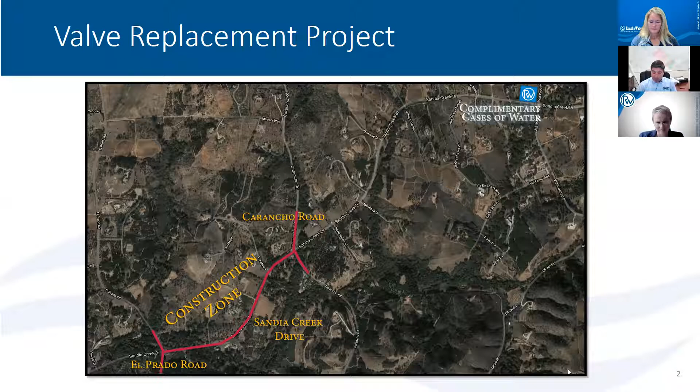So what is it that we're doing? At the intersection of Sandia Creek and El Prado, we're going to be replacing 7 isolation valves. They range in diameter from 8 to 24 inch. In addition to those 7, up at Carancho Road and Sandia Creek, we're going to be replacing 1 24-inch valve. We have an outside contractor that'll be doing the work at Sandia Creek and El Prado, and RCWD crews will be doing the work at Sandia Creek and Carancho, the 1 24-inch valve.

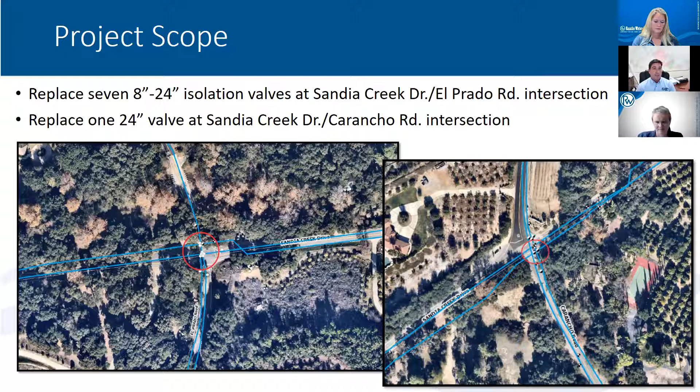Why do we put these isolation valves in? Really, the isolation valves are just for that. They're for isolating sections of our distribution system so that when we have to shut it down, whether planned like this event or unplanned, we have manageable sections of pipeline to deal with. Pipelines have to be drained and brought back in service once work's completed. So the isolation valves are really critical to the ongoing maintenance and repair of our system.

So I'll take you through a little bit of the timeline of what you're going to see, like Kimmy said, from Monday night to Wednesday morning. And even beyond that, because first thing is pre-construction activities. What we'd like to do is actually pre-dig the sites, so before we do the work, we open up the hole. This is before any shutdown occurs. Actually, we've been doing that this week, opening up sites, really so there's no surprises. We know exactly what's there. We know we have everything we need to complete the work. And really, we're ready to go. When it's time to shut the valves and start draining the lines, we're ready to go.

From there, our crews, our operations team goes out, closes the valves that need to be closed, and dewaters the pipelines. On a large shutdown like this one, and I'm going to show you the impact area in a couple of slides here, this is an extended duration. It's about a 6 to 8 hour window to actually get those valves turned and drain the line. It's a large amount of water that will be draining at several locations within the area. From there, traffic control is set up.

We want our crews to be safe in the intersection, and from there we remove the traffic plates and begin the work. And really, that's taking the old valves out, putting the new valves in. I'm going to show you some photos to give you some perspective on what that looks like.

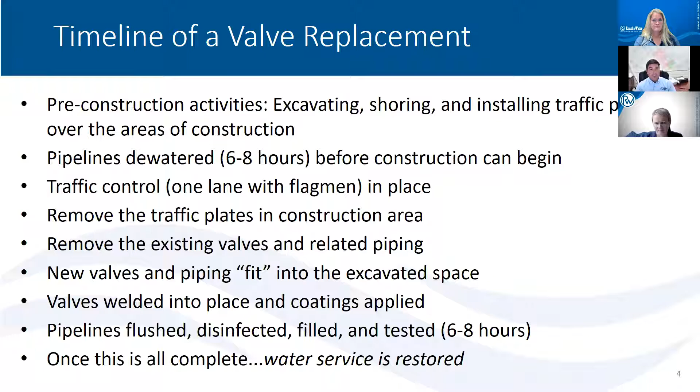A lot of this timeline, I know we're talking about an extended duration, is really about preparing for and then finishing after the work. It's 6 to 8 hours to drain, and about 6 to 8 hours again to flush, disinfect, test, and bring it back online. So that's a good portion of that timeline.

Just to give you some perspective on what this looks like - this is a job that was actually up on the hill, a valve replacement job. You can see the types of pipes we're dealing with - fairly large diameter, good size valves. It requires heavy equipment and large crews to conduct this work.

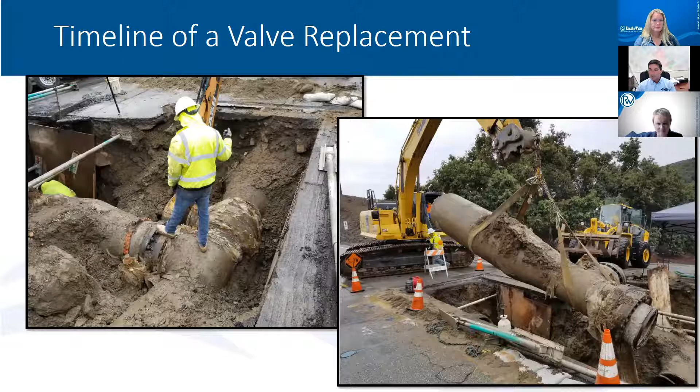So these are the first steps: uncovering the pipe. You see the shoring in the background, removing the old section, getting that out of there, and then from there, putting the new section back in place.

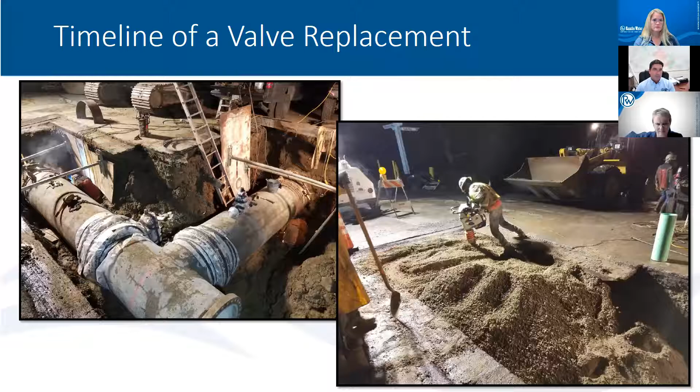You can see the valves here wrapped. Everything's welded back up, we coat everything to make sure it's protected from corrosion, and then we bring it back online. This is the last step - we backfill behind the pipeline, repave everything, and button everything up to bring the street back in service.

So who's impacted by this? We've got about 150 services, which for this area is a large area of land. Obviously large properties up there, so 150 services covers a pretty large area.

These here in pink, those are all the services that'll be shut down. So if you're on tonight and you're one of those dots, you received a letter and a phone call, and you're within that shutdown area.

Again, we're going to start on Monday night - Monday at 10 o'clock is when we're going to start the shutdown. That's going to be us closing the valves and beginning the process of draining the pipelines. So all day Monday we'll be prepping, but the water service will be on all day Monday up until the evening. Our estimate for water service restoration is 6 a.m. Wednesday. We're going to work nonstop from Monday when our operators get out there to shut the pipeline down.

Construction Tuesday during the day - that's all the valve replacements. Then we estimate that's going to go into probably the early evening hours, and then starting that process of bringing the lines back into service. We're estimating back into service by 6 a.m.

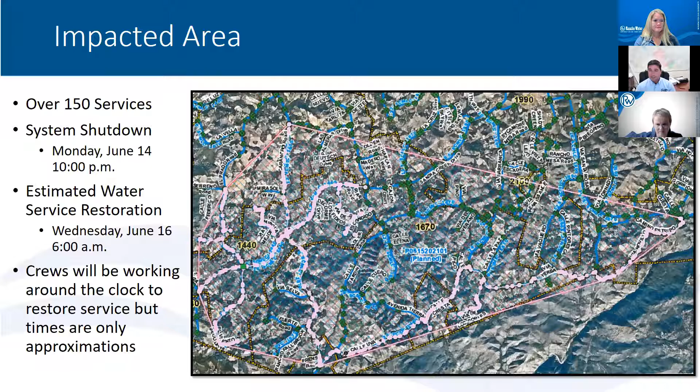You get surprises on these jobs sometimes. Things don't fit right, things happen that can extend the timelines, but this is our best estimate, and we're going to do everything we can to try to beat this. But we always like to give you a reliable timeline on it. So that's the impacted area.

Why are we doing this now? Just a little bit of background on this - we actually issued a construction contract last year for multiple valve replacements across the district that this contractor was working on. This is actually the last section that we were doing, the end of that job. But we had scheduled 2 shutdowns for April to do this.

So we were going to do the work in El Prado and Sandia Creek in 2 phases. The reason we were doing it in 2 phases was for a less impactful shutdown - get one valve cluster replaced, a smaller area shut down, more manageable, and then come back for a second shutdown, much less impactful because now we've got those valves we can use. The issue being, on April 21st, we went to shut the system down, and the less impactful shutdown that we had planned was less than successful.

We couldn't get the system tight enough to actually complete the work. Water was passing by the valve. One of the main ones was a 24-inch valve that we're going to replace with our crews, and it was going to require us to move back to the shutdown you just saw, but unplanned.

We would have had to start this timeline without notifying 75% of the customers that would be impacted. We had already been out there all day, so safety was a concern as well. We've got a contractor that's already been on site for 12, 14 hours, and now we'd be working into the next day probably to get the system shut down.

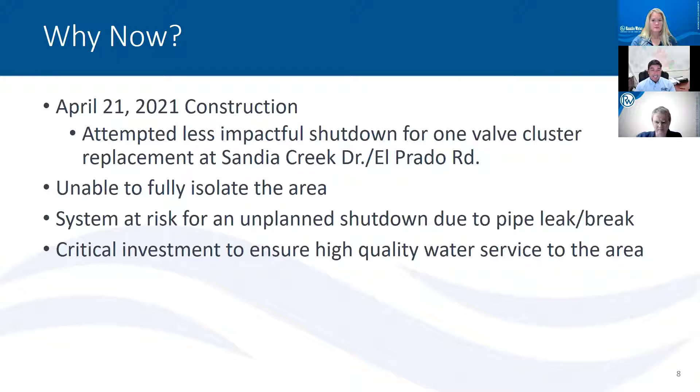This is really a critical investment to ensure that the level of service we provide to the area is top notch. Having valves that are unable to isolate the system is unacceptable for us. So we really need to do this work, and it needs to happen now. Every day that we don't do it, we're at risk. So we want to take care of this as soon as possible, and that's what we've been gunning for. That's the overview of what we're going to do and why.

I'm going to turn it back over to Kimmy to talk about some of the outreach and other things we're doing. Thanks, Jake. First of all, we understand that this is never a good time to do this, and we appreciate everybody's patience and support as we do this work that, as you've heard from Jake, has to be done now.

You can swing by at any point during this shutdown and pick up a case of water for your residents. We'll be out there Monday, late afternoon to evening, from 6 p.m. until 8 p.m., and then the following day, Tuesday June 15th, from 6 a.m. to 8 p.m. So come on by and see us. Our public information staff will be out there handing out water.

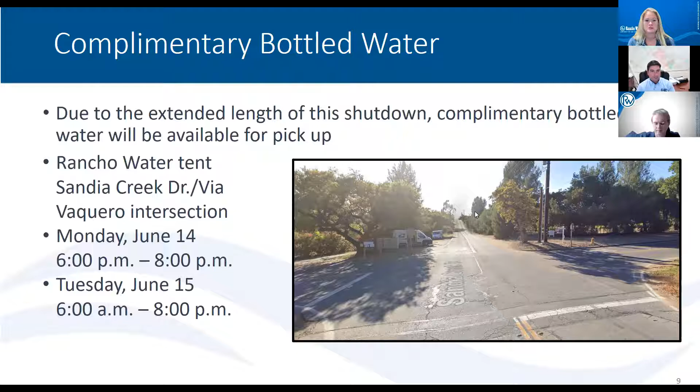Also, before you switch slides there, Jake, we are going to have a portable restroom out in this area as well. It should be placed right over by the mailboxes. So if it comes to it and you decide you can't use the restroom at your house, you're welcome to come use ours. We'll have a porta potty out there for anybody's use.

And then for communications, you've probably received most of this, but we did try to do a longer lead time than usual for our regular shutdowns, since this is going to be an extended time period. We had the web page posted on June 1st, which is probably where you found most of the information to come to this Zoom meeting, but it's ranchowater.com/watershutdown. The notification letter went out June 2nd.

We had door or gate hangers, depending on your property, come through on the 8th. There was also an e-blast that if we have your email on file, it came to your email on June 8th. You should have gotten a call from our customer service team probably on the 9th. And then this webinar tonight, and then you'll also get a reminder text or call on June 14th, which is Monday.

So that is for anybody affected by this shutdown. The website is going to be updated during construction. So if Jake or the rest of the team gets back to us and says the work is moving faster, or we need to put some kind of update so residents know, we will put it on that water shutdown webpage.

There will also be an alert on the homepage of the website, so you can just go there, you don't have to find the water shutdown page. You'll just see the alert button right at the top. You can click on that and get the same information. You can also call our 24/7 construction hotline at 951-296-6904, or email us at construction@ranchowater.com, and we will get back to you as soon as possible with any information you need about this shutdown.